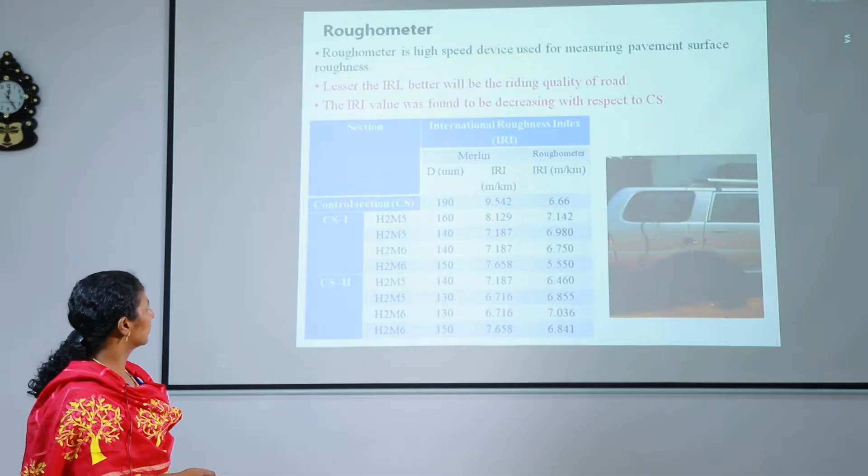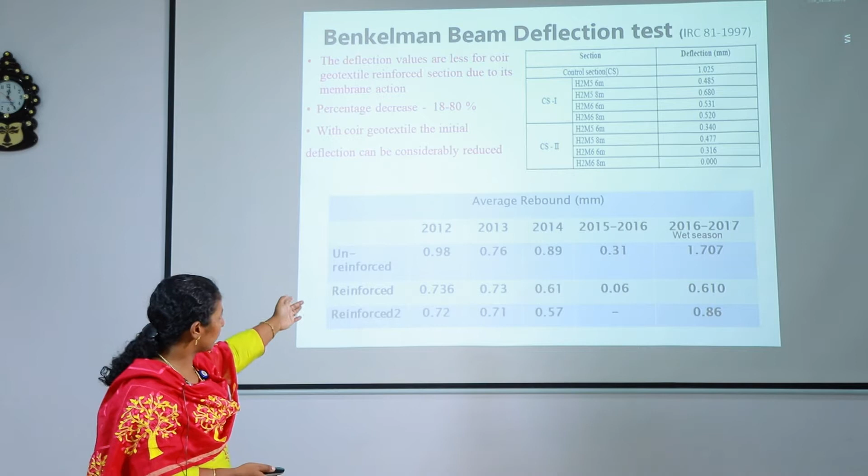Average rebound values for different periods of time, from 2012 to 2016-17. Studies were conducted before and after rain each year. Results for around 4 to 5 years show a percentage decrease of around 18 to 80%.

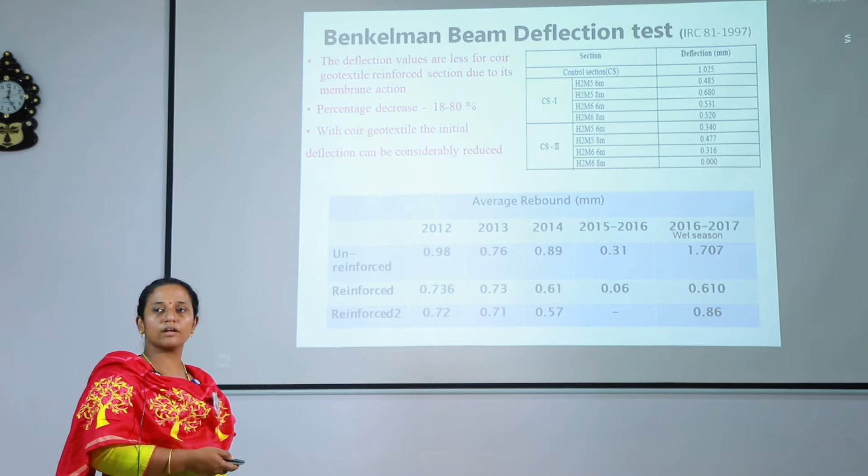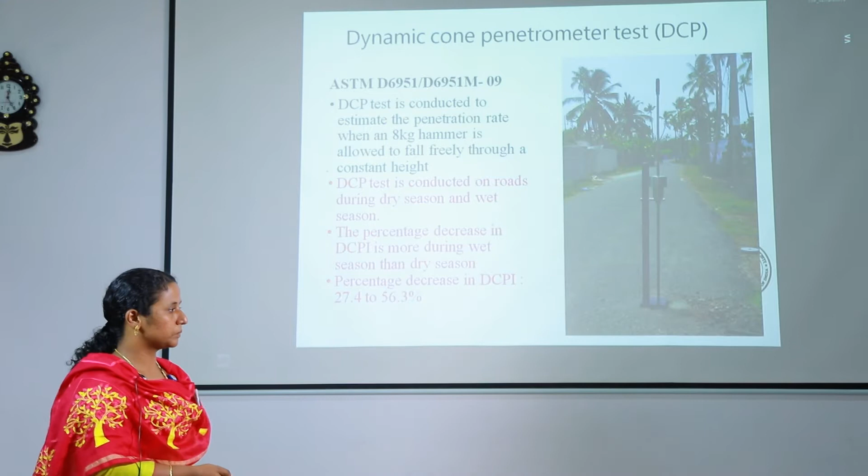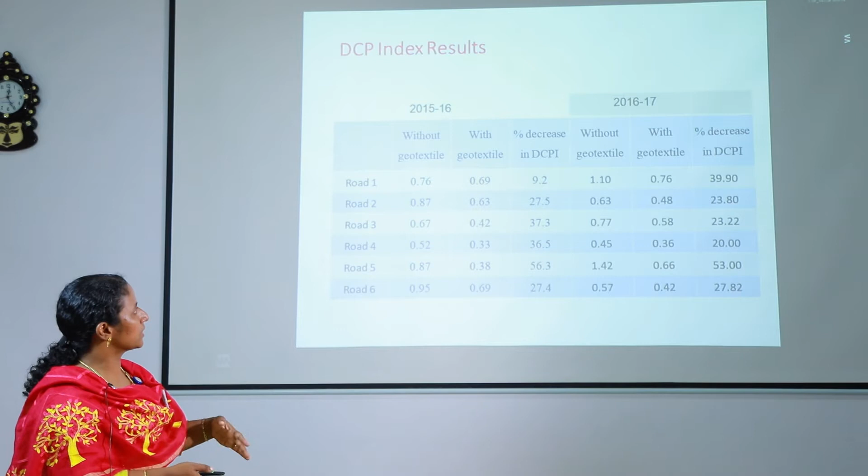DCP test is conducted on the roads during dry season and wet season. The percentage decrease in DCPI is more during wet season, around 27.4 to 56.3%. The picture shows DCP results for the period 2015-16 and 16-17, showing the decrease in DCP values when reinforced with coir geotextile.

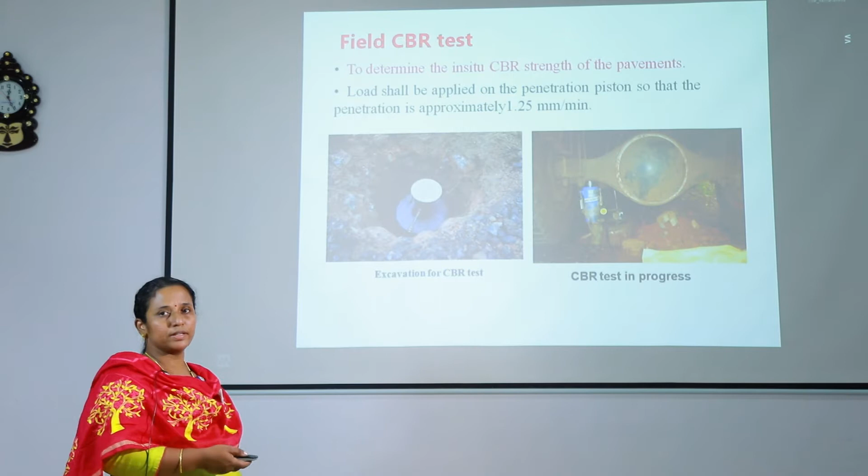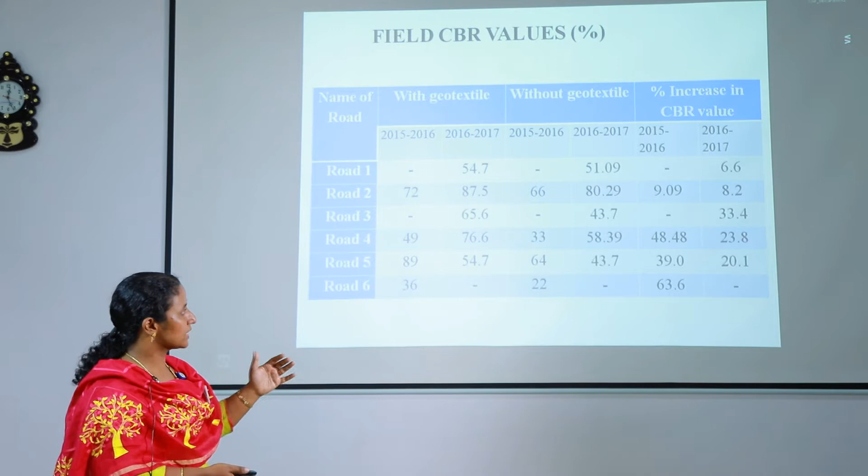Next is the field CBR test to determine the in-situ CBR strength of pavements. Initially we conducted laboratory CBR studies, now we come to the in-situ CBR strength. We can see a difference in CBR values with and without coir geotextile, meaning CBR is enhanced when using a coir geotextile layer in the soil. CBR values have increased by up to 63%, depending upon the type of soil.

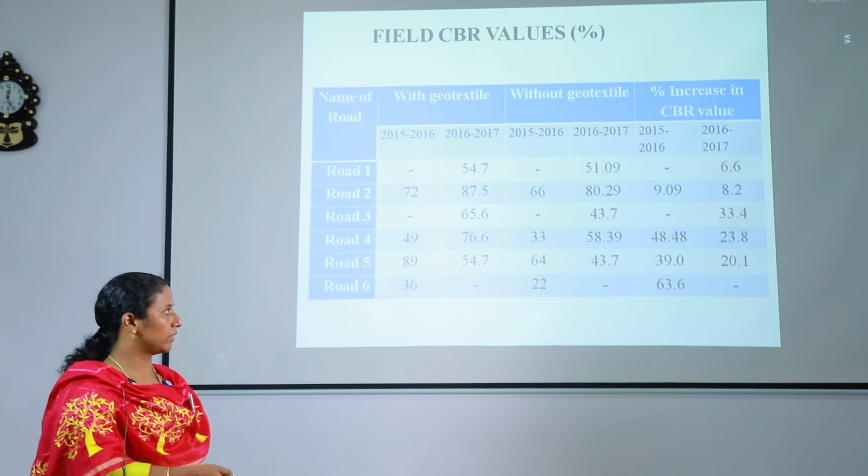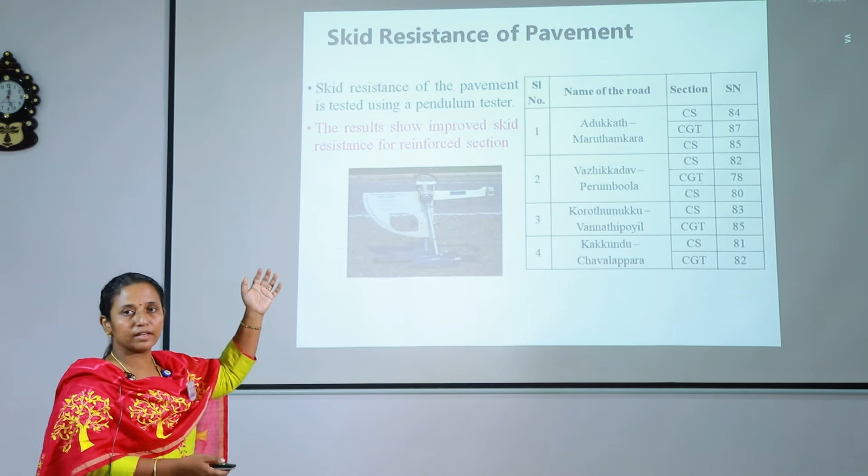Next test is the skid resistance of the pavement. The results show the control section and coir geotextile section. From the table, the control section has less skid resistance compared to the coir geotextile reinforced section, meaning our roads perform well in the skid resistance parameter also.

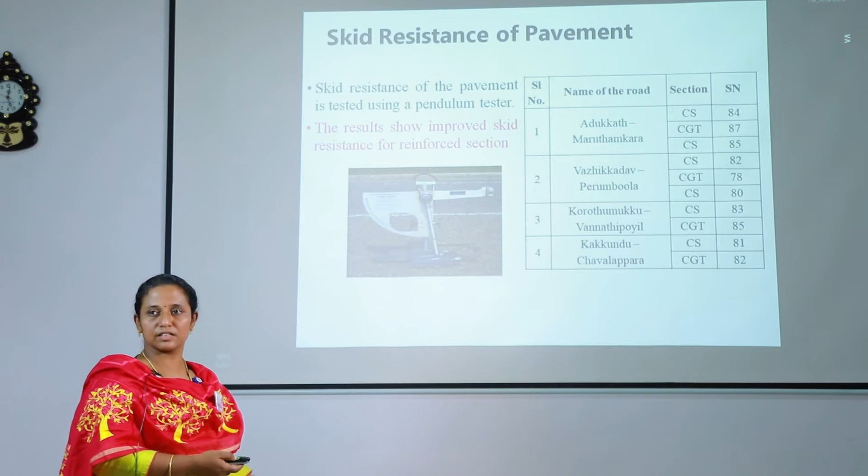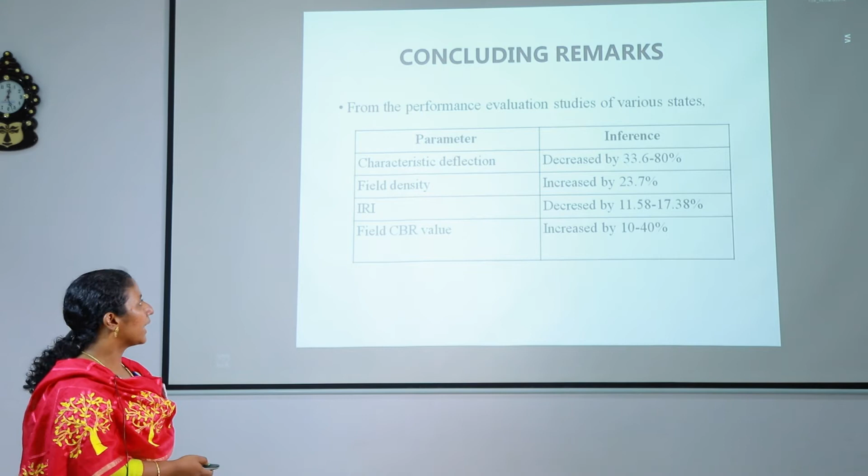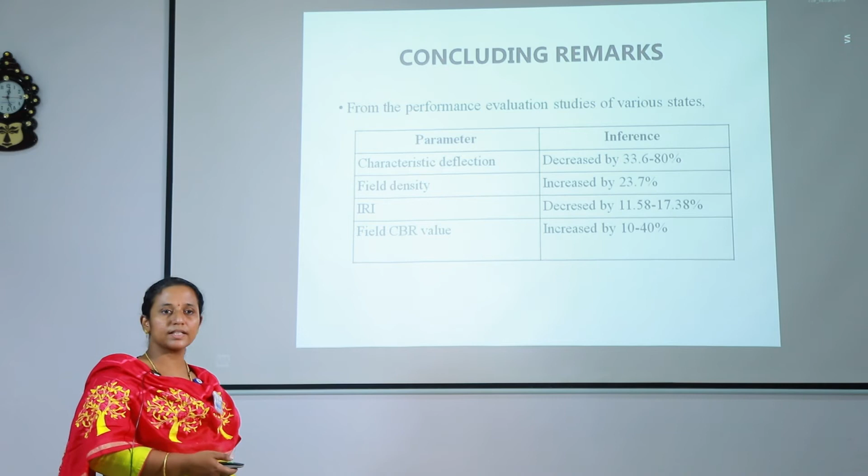Concluding remarks: characteristic deflection values decreased by around 33.6 to 80%. Field density has increased by 23.7%. IRI values have decreased by 11.5 to 17.3%. Field CBR has increased by 10 to 40%, meaning our coir geotextile reinforced roads are performing very well.

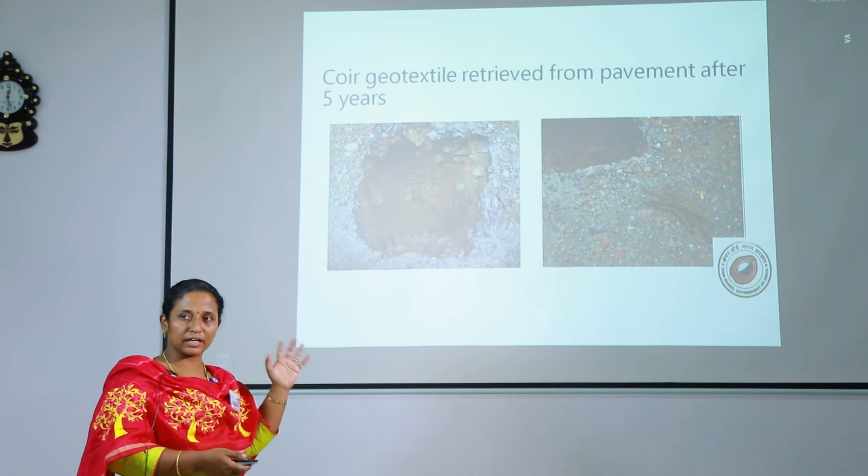The picture shows coir geotextile material excavated from the soil. After 5 years of construction, for conducting a test, we dug this hole and found coir geotextiles are lasting even after 5 years of construction.

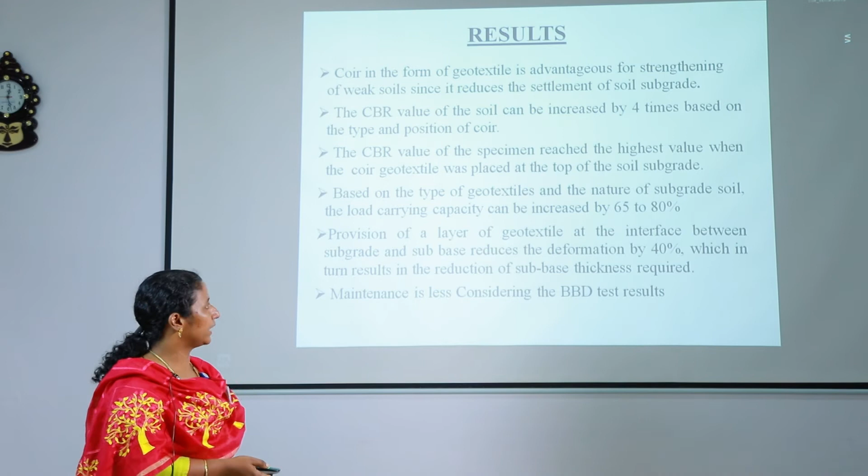The results of the study show that coir in the form of a geotextile material is advantageous for strengthening the soil. CBR values can be enhanced up to 4 times. The CBR value of the specimen reached the highest value when the coir geotextile was placed at the top of the soil subgrade.

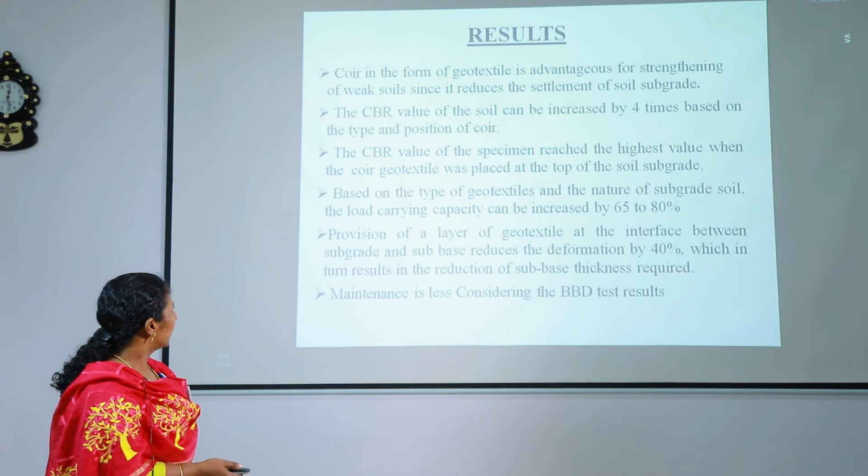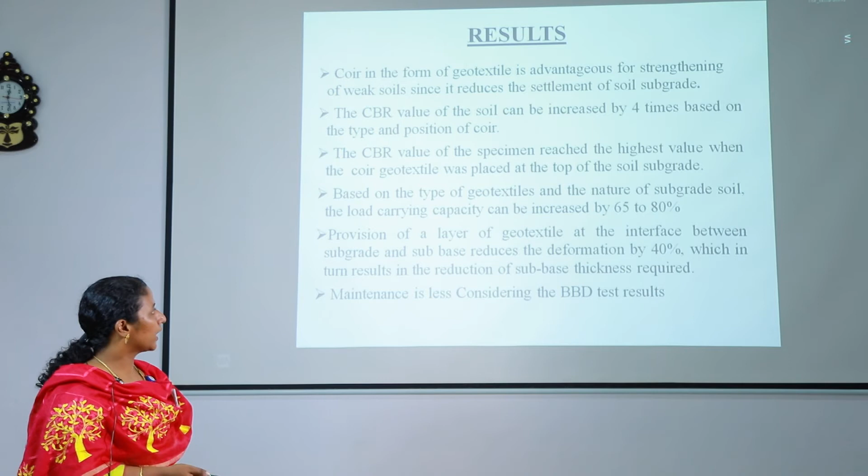Based on the type of geotextile and nature of the subgrade soil, the load bearing capacity of the road also gets enhanced. Provision of a geotextile layer at the interface between the subgrade and subbase reduces deformation by 40%, which in turn results in reduction of subbase thickness, thereby reducing construction cost. The maintenance cost is also less, considering the BBD results.

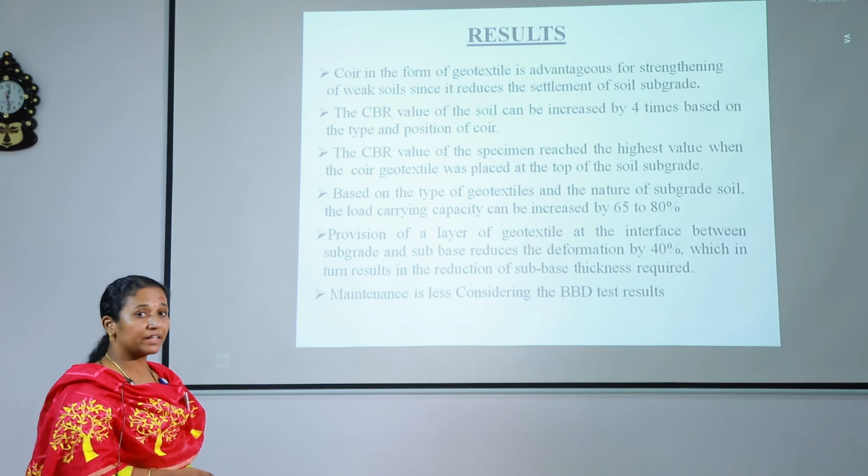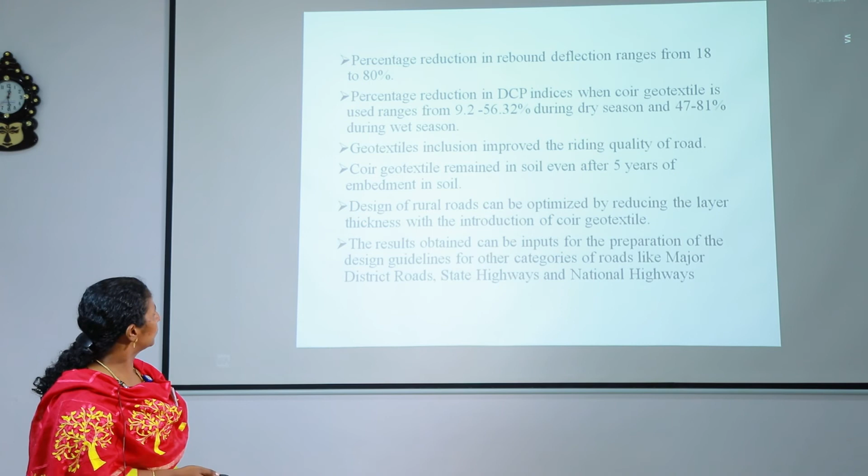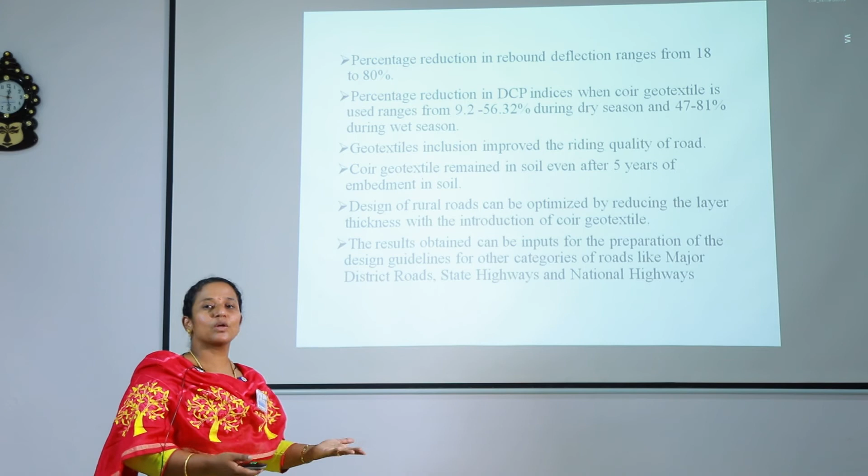Percentage reduction in rebound deflection ranges from 18 to 80%. DCP value reduction is around 9.2 to 56%, depending upon the type of road and soil. Ultimately, geotextile reinforcement will enhance the life of coir geotextile reinforced roads.

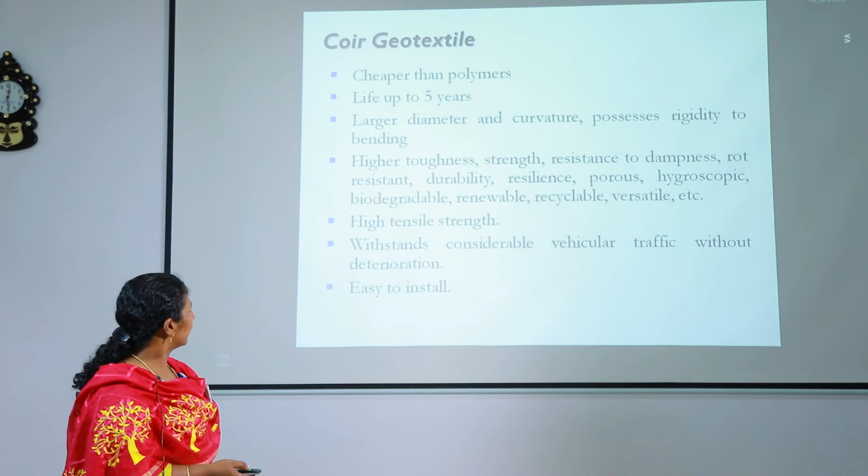Coir geotextile has the advantage of being cheaper than polymers. It lasts a minimum of up to 5 years in consolidated conditions. It has larger diameter and curvature, and has the advantage of being a natural material, strong among other natural materials.

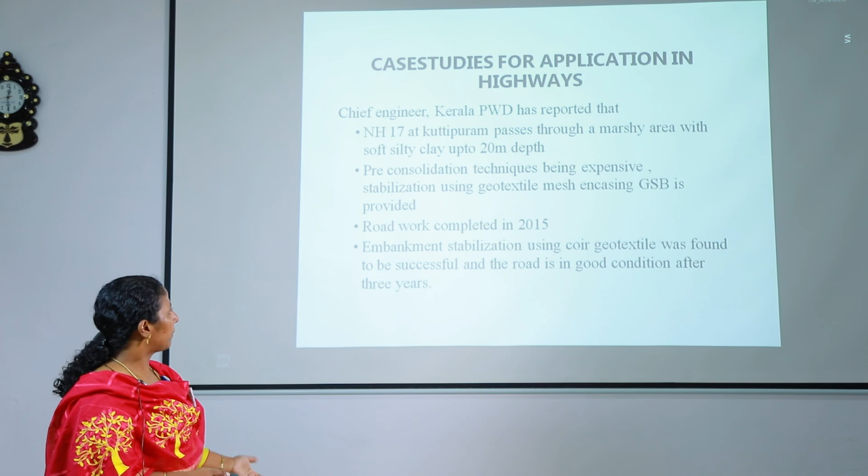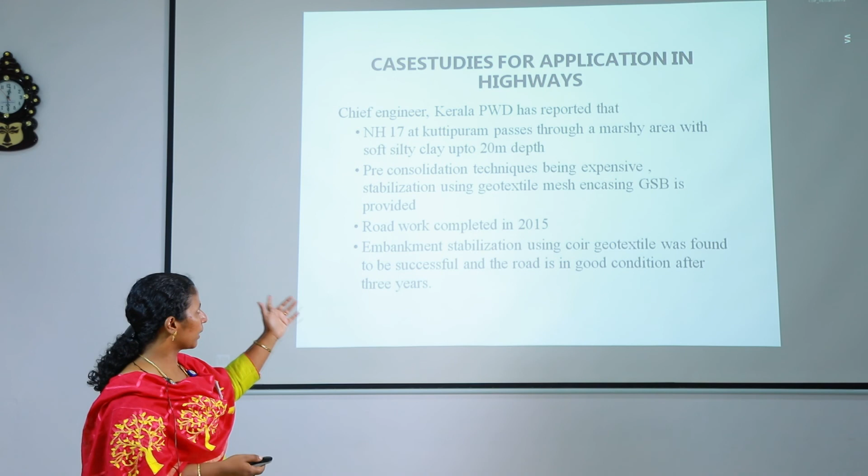The road work was completed in the year 2015. The embankment stabilization using coir geotextile was found to be successful, and the road is in good condition even after 3 years. The roads are performing well. This report was given by the Kerala PWD department on the use of coir geotextiles in NH17.